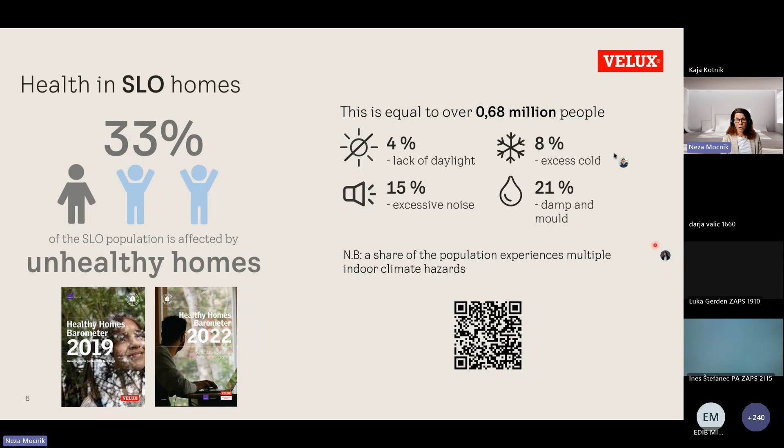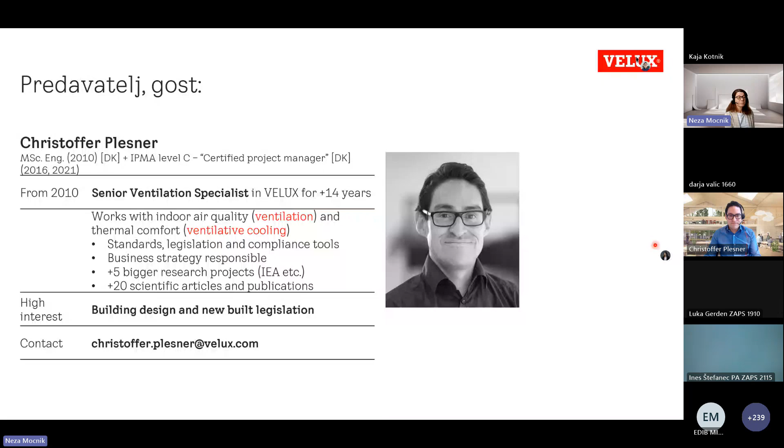Hello, Christoffer, I hope you are with us. Do we hear each other? I'm here with you. Great, great. Yeah, I've said a few slides before you start, but before I give the microphone to you, just let me

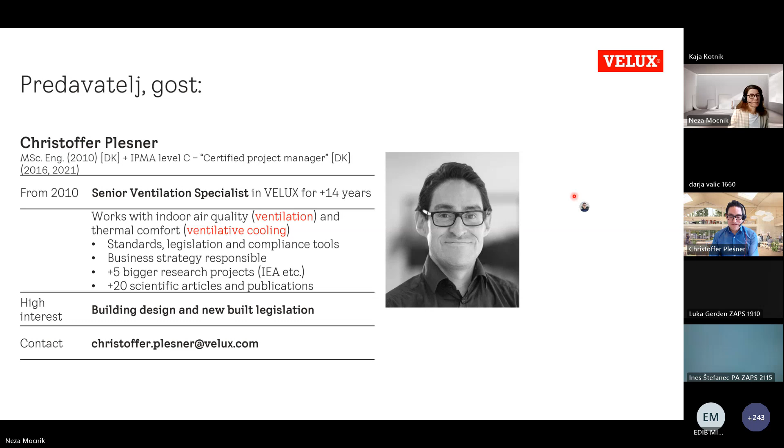Yeah, you should press the slide and it should go forward. Yeah. Okay.

Yeah, so I will start off by telling about well-being in buildings. So buildings must ensure good daylight conditions, view to outside, sufficient fresh airflows, and prevention of overheating, and also offer good connection to outside using windows, and also resilience. So the building should be resilient to, for example, if the power goes out.

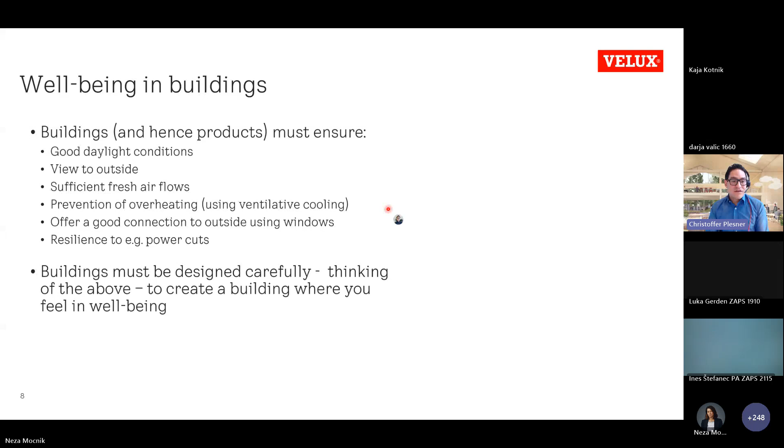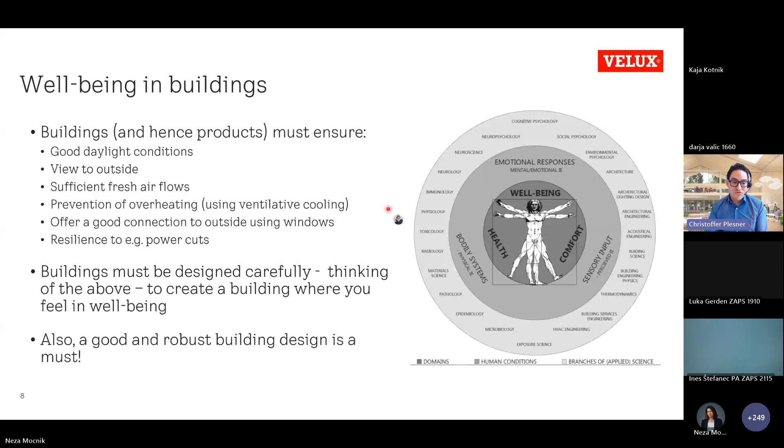Buildings must be designed carefully, looking at the above points to create a building where you feel that you are in well-being. And on the right side, you see a figure showing that well-being is another part of health and comfort. So we want people to be in well-being, and also we want a good and robust building design by using the points that I just showed.

And if we look at the holistic view of a building, we have what we call the indoor environmental quality, which is a lot of things. And in a building, we must take care of the environment, energy, and comfort. But if we look at the indoor environmental quality specifically, there are 4 points. One is thermal comfort, one is indoor air quality, and then you have lighting and you have acoustics. In this presentation, I will primarily focus on the first 2 points. Thermal comfort, that's for temperatures, and indoor air quality is, for example, for CO2.

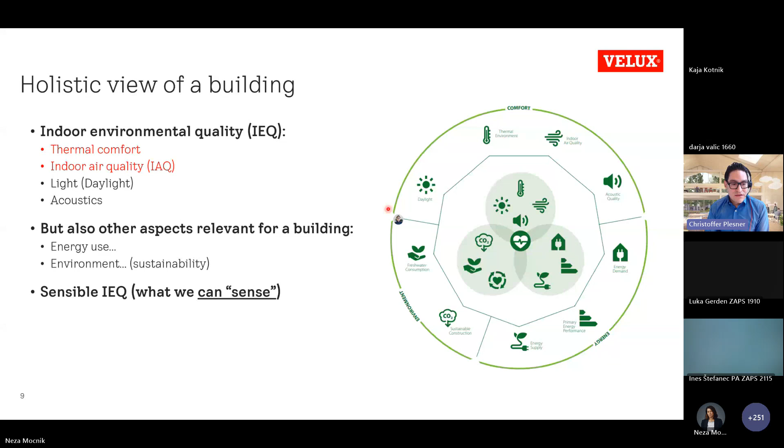And as I said, there are many aspects to take into account, but also look at the energy use, look at the environment. So that is the sustainability part. And then, if you are in a building, there are things we can feel or sense. That is, for example, temperature. You can feel if it's too hot or cold. The light, you can also feel, and if there are bad smells.

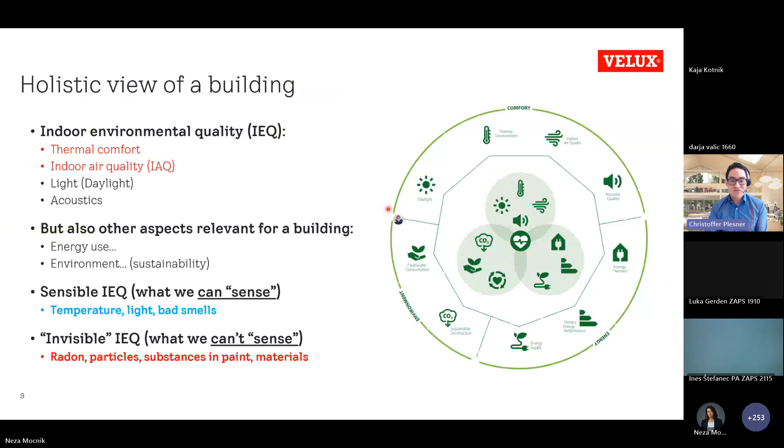But then there are what we call the invisible indoor environmental quality, which are things we cannot sense. So that is, for example, radon, particles, substances in paint, materials. So those are things that we cannot sense. And for that, it is good to have, for example, sensors to register that for you.

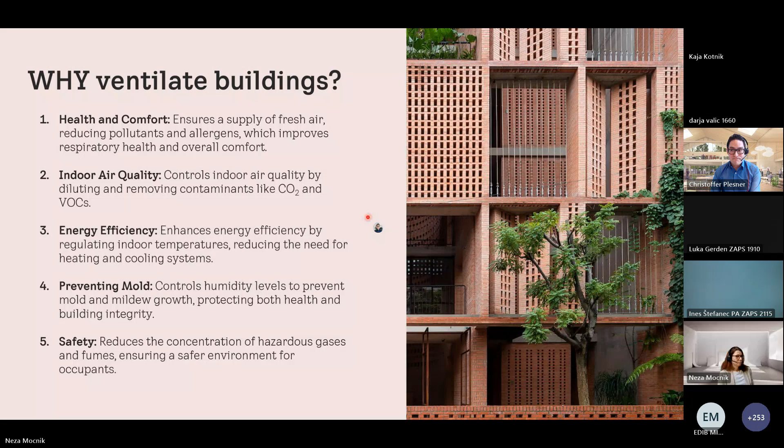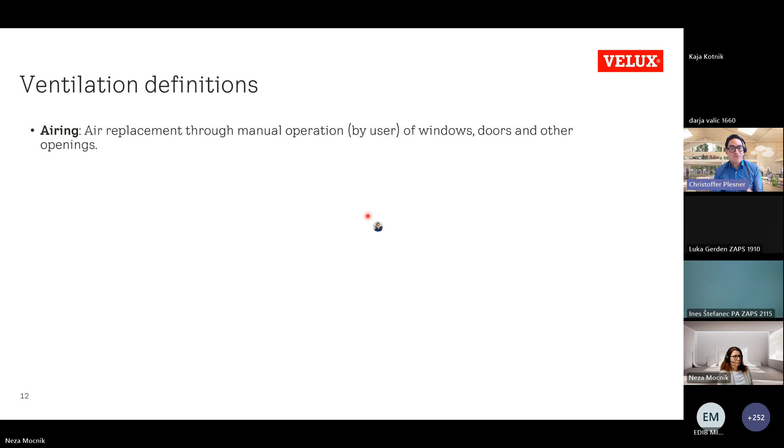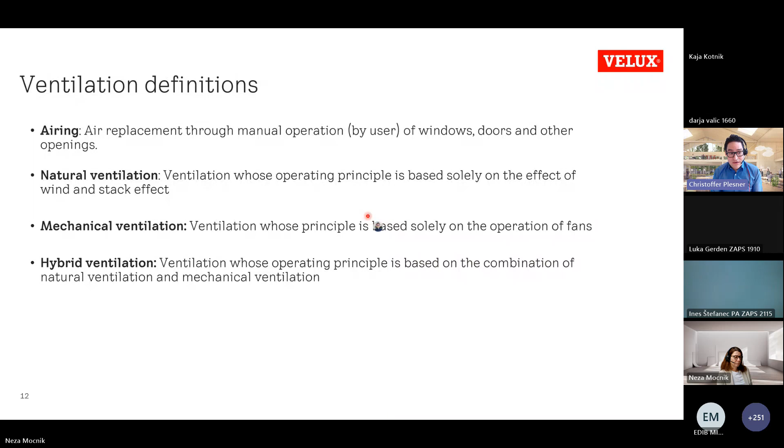I'm pressing, and then we have some ventilation definitions that we think you should know. So airing is if you open the window manually by the user through, for example, windows, doors, or other openings. Natural ventilation is an operating principle based on the effect of wind and stack effect, whereas mechanical ventilation is if you base the principle on the operation of fans. And then we have hybrid ventilation, which is a combination of natural ventilation and mechanical ventilation.

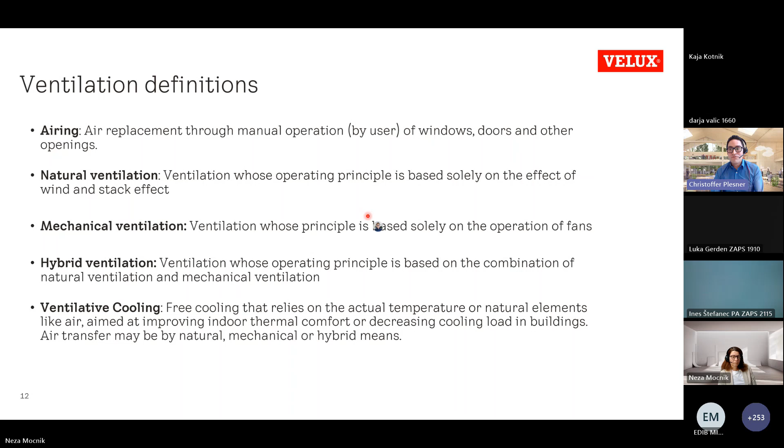And then we have a term called ventilative cooling, which we also use in this presentation. And that is free cooling, where you use the outside temperature, aiming to improve the indoor thermal comfort or decreasing the cooling loads in the buildings. And this air transfer may be by natural, mechanical, or hybrid means. So ventilative cooling is, for example, if you open the window and you can then cool the indoor air using the outside air, which doesn't cost a lot of money.

And airing, as I said, can allow fresh air to come in and the stale air to exit. And this is when you feel a need for something, and here you rely on the natural air movement and human feelings. It's a simple and immediate way to refresh the indoor air, often used in homes and small spaces, and is very good for quick peak pollutant removal.

And then we go into ventilation, which can be by natural or mechanical means. And here you can see for natural, it can be using windows or vents. For mechanical, it can be using the fans or the whole HVAC system in a building.

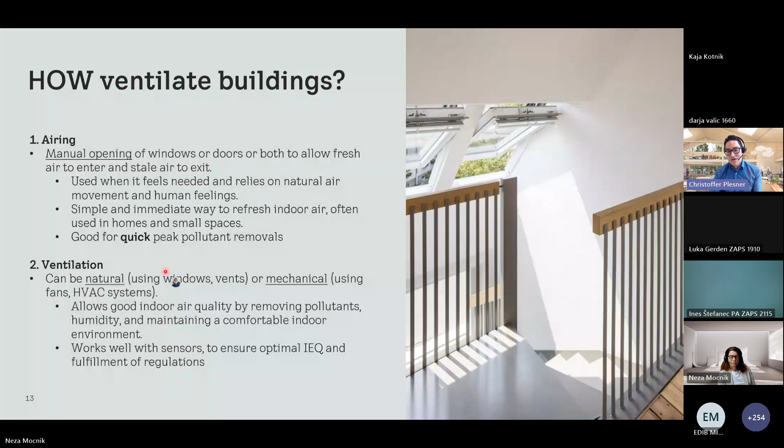And ventilation allows, for example, good indoor quality by removing the pollutants, humidity, and to maintain a comfortable indoor environment. And it works well with sensors to ensure optimal indoor environmental quality and fulfillment of the regulations. And with sensors, it's sometimes easier because then you can register the pollutant that you want to dilute.

There are 3 types of natural ventilation. The first type is single-sided ventilation, which you may have heard of. It's where you have one opening or more, but on the same facade. This is what we call single-sided ventilation.

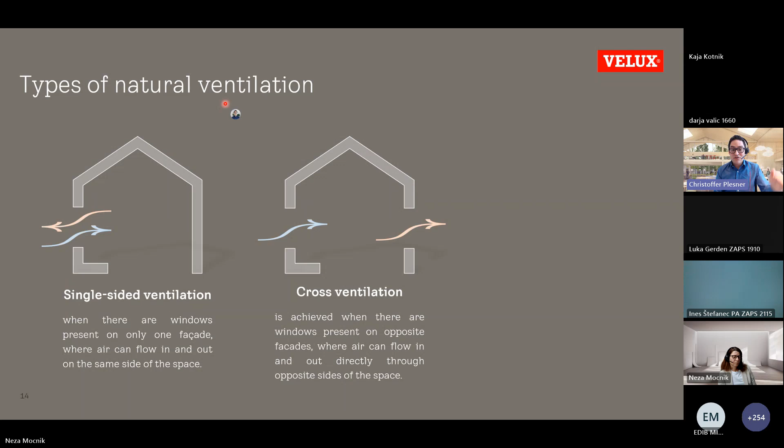Then we have cross ventilation, which is when you ventilate across the building through openings in different parts of the facades. And this can both be through facade windows, but it can actually also be, if you have an attic, through the roof windows in your attic or in the top floor, as long as it's across the room or the building.

Then we have stack effect ventilation, which is when the warmer air is lighter than the cold air, and then the warm air rises and the cold air sinks, and then you can remove the contaminants in the building because the hot air rises, and then you can escape it through the roof windows in the top of the room or building. So those are the 3 types of natural ventilation.

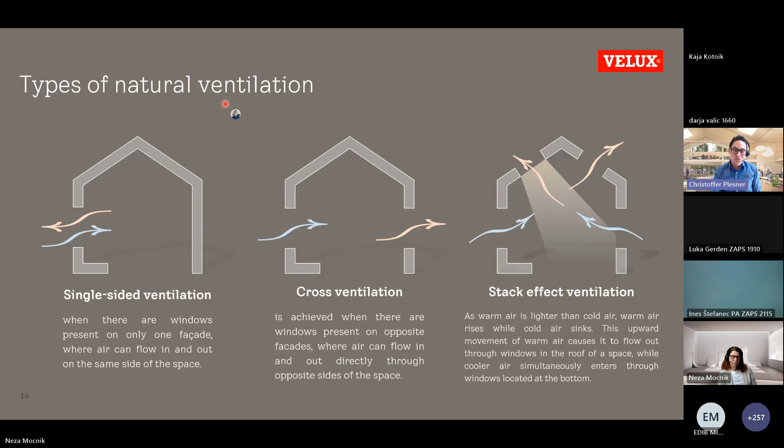And of course, it's important to think of the design here. So if you know that you early on want to use stack effect ventilation, you really have to think of where can you have the facade openings and where can you have the roof openings, because the higher height difference you have between the supply and the extract, the more airflow you can get in your building. So for architects, it's very important to think of the design when you think of these three types of natural ventilation.

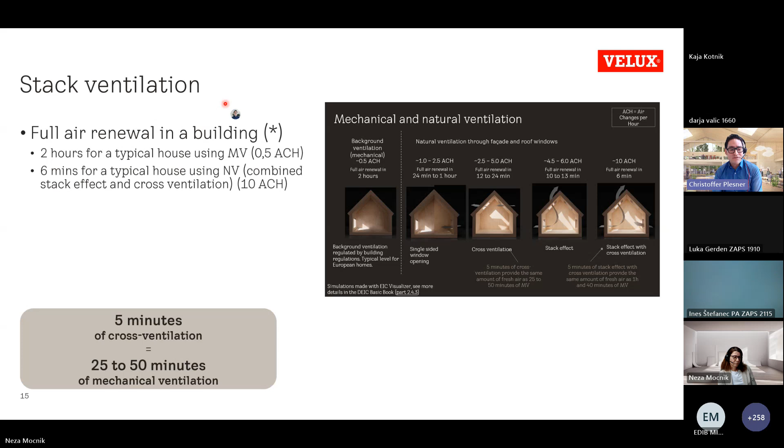And here's a simplification: if you have 5 minutes of cross ventilation, this is the same as 25 to 50 minutes of mechanical ventilation, the 25 and 50 minutes depending on if it's summer or winter. Then if you take 5 minutes with stack and cross ventilation, then you need 1 hour and 40 minutes of mechanical ventilation.

So to achieve a good indoor environmental quality, the typical mechanical ventilation system alone is not enough. So there you often need to use stack ventilation with openable windows to achieve an airflow to dilute, for example, if you have a lot of people in a room or you have painted or something else. So this was just to show you the effect of openable windows in a building.

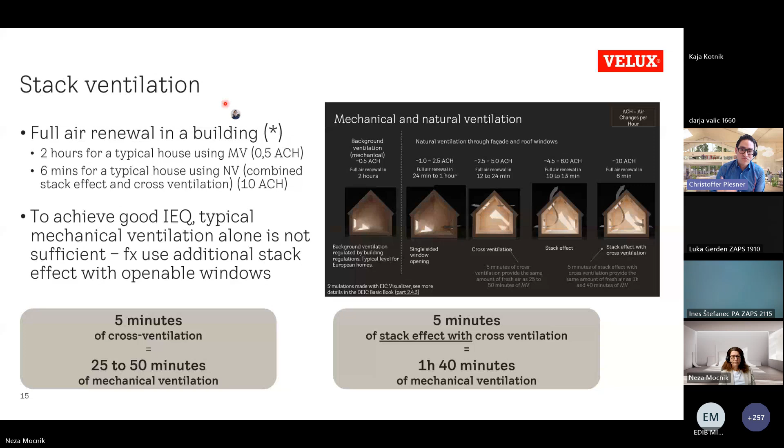And air change rate is the way that you usually, or sometimes in regulations, state the amount of air renewal in a building based off an airflow rate, which could be in cubic meters per hour. So you need to convert that into air changes.

For health and energy efficiency, there are different solutions. Natural ventilation is one. It's fast and intuitive. You can use operable windows, which are a must-have in homes. For natural ventilation, there is a lack of heat recovery. And for mechanical ventilation, you can reduce the heat losses. It's independent from the user behavior. And it's less user-friendly and prone to failures. And this has been shown in many studies.

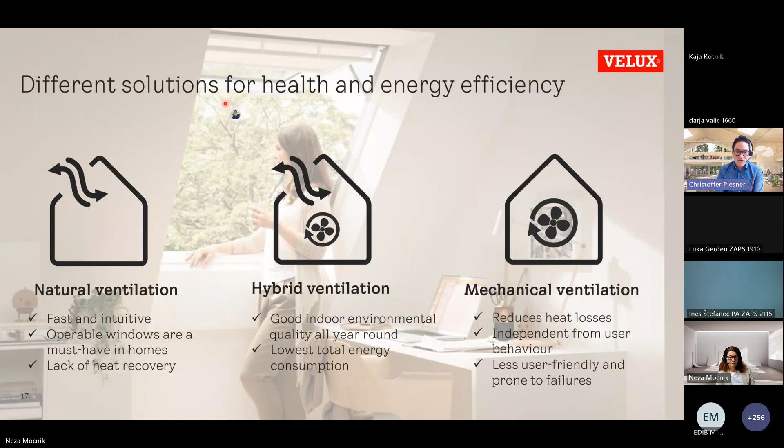But the best solution is usually the hybrid, which is a combination of both natural and mechanical. So then you can switch when the times are right. And this usually is good for the lowest total energy consumption in a building. So if we go a little more into the hybrid ventilation, what is that? It's many things, but as I say, it's a combination of natural and mechanical.

So it can be that you want to run natural ventilation during the summer period and parts of the transition periods when there is a need to cool the building. Mechanical ventilation is very good during winter, where you can have heat recovery to recover some of the heat from the exhaust air that you are throwing out.

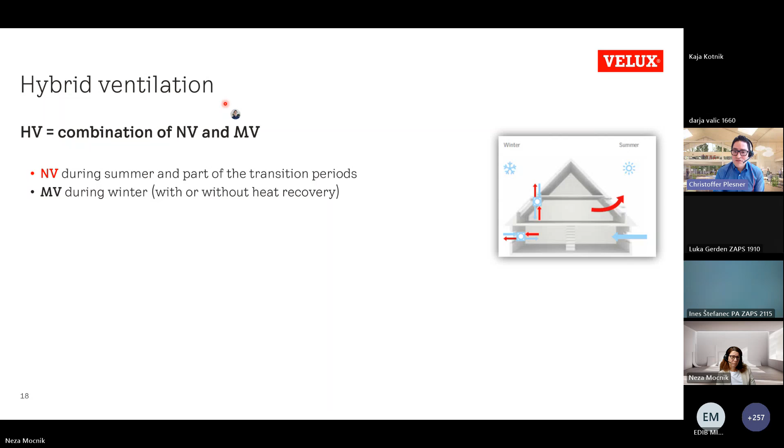And this is just a figure of how this can be shown, where you on the left side have the mechanical part during the winter, and in the summer you open your windows to cool the building. And for the night time, it's very good with night cooling using openable windows.

And then you can also have a natural ventilation system running what we call the basic ventilation, so it changes the air basically, and then you have mechanical ventilation assisting when the driving forces are not enough, so when they're low. And this is a fan that assists the natural airflow.

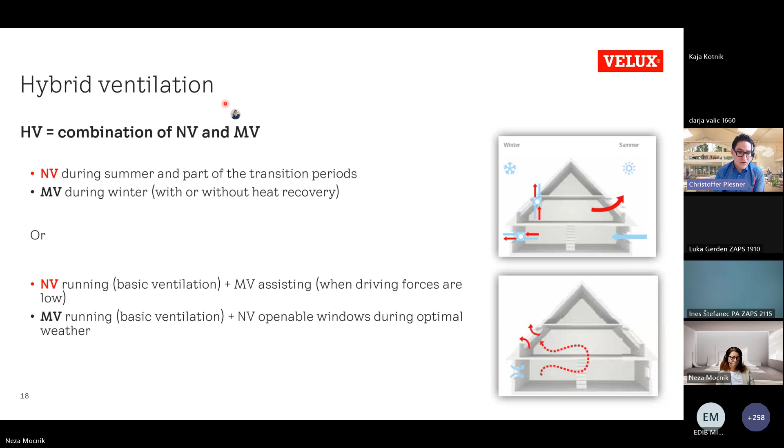You can also have a mechanical ventilation system running basic ventilation at least through the winter, and then you can assist with natural ventilation with openable windows when the outside weather is allowing natural ventilation to run. So there are many types of hybrid ventilation, but these are two typical types that we will talk about. So now you know that.

But the use of openable windows is an important aspect of hybrid ventilation because it's very cheap to open the windows and you can do it when the times are right. And here it's good to think of a sensor system, and we can always be part of sensor solutions.

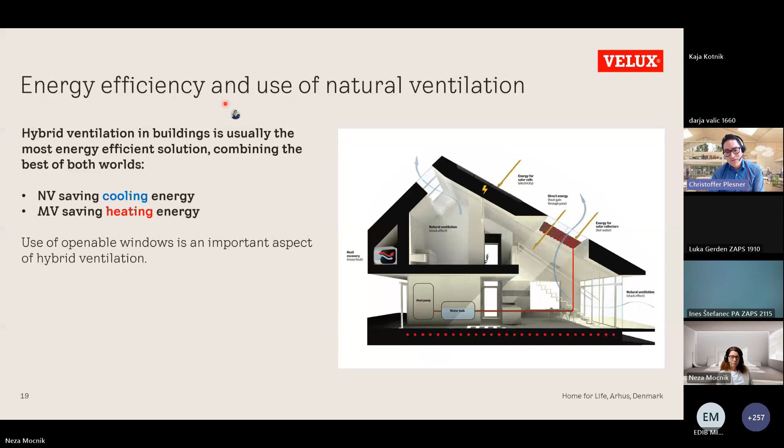Yeah, and then here's a study of, you can say, the relevance of natural ventilation. And this was a study for a residential building. In the study, you see that hybrid ventilation is more energy efficient than mechanical ventilation. So here it was comparing, on the left, mechanical ventilation, which is the bar, to hybrid. So the mechanical with heat recovery is compared to hybrid, where you have mechanical and natural.

So for the hybrid part, you have natural running in the summer period to save some energy. So because of this saved electricity during the warm periods, and the use of mechanical ventilation in the cold and NV in the warmer periods, you have this saving. And this gives a decrease in the total energy demand. You can see this on the right side, comparing 3 cities, Istanbul, Paris, and Copenhagen.

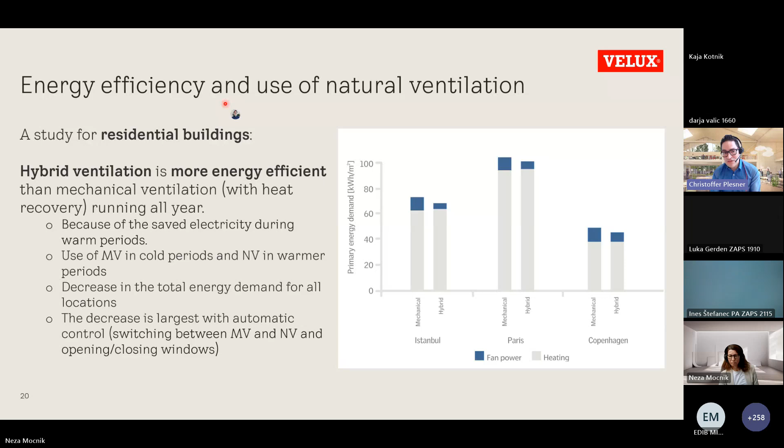And the blue is the fan power. So you can see for the hybrid, you use less fan power because you have natural ventilation running during the summer. So the decrease is largest with the automatic control, where you switch between the mechanical and natural. So you need a good control, of course, to have the best saving.

And then there are benefits of natural ventilation. I think I mentioned it a little bit before, but it's a good solution for peak load situations. This can mean that, let's say, you have a party in your home, or a big meeting, or a lot of people gathered; then you have a lot of CO2, temperature and humidity emitting. And here it's very good to get rid of this polluted air quickly. Here we can use airing by opening the windows accordingly. It can also be when you cook or clean.

And then we must not forget what the humans want. They want to look outside. They want to have a connection to the outside space. They want to hear the birds singing. They want to hear what's going on. And these are the psychological needs. So here is where the openable window is also very strong. It gives you that connection to the outside, apart from, of course, being good for stack effect or cross ventilation.

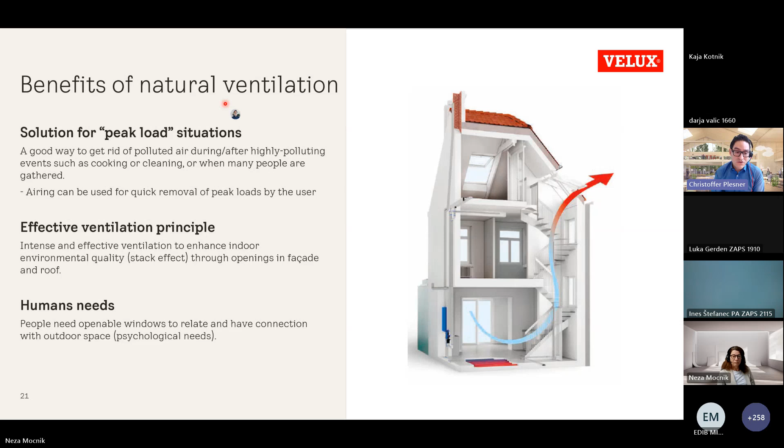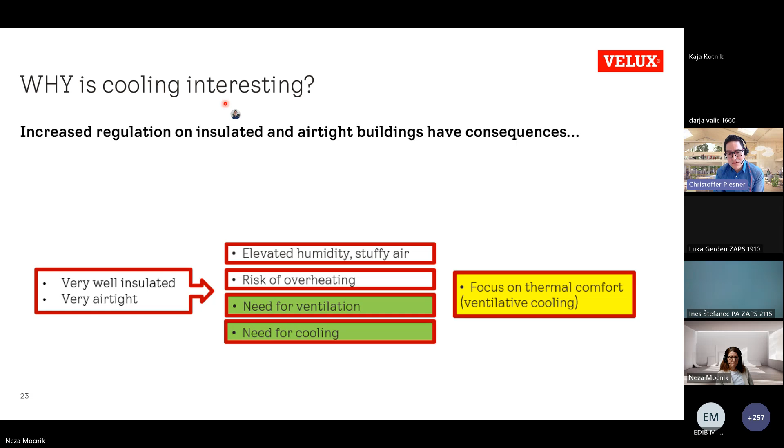But this really gives a need for ventilation and for cooling. And here it's very good to have ventilative cooling, which can cool the building, and this gives a focus on the thermal comfort. And there are requirements in most European countries on temperatures, so the thermal comfort.

Space cooling is, you can say, the amount of energy you need to cool down the building. So we really have to think of the right space cooling solutions. You can always install mechanical cooling, but it uses so much energy. So it's good to think of using passive cooling before active.

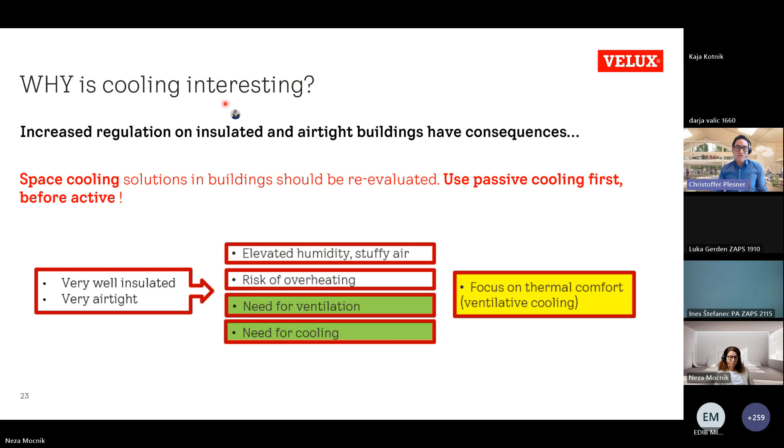So we're not saying you must not use mechanical cooling, because if there is a heat wave, it's a good idea to think of using mechanical cooling for that part. But for the remaining part, it's very good to open your windows, for example, using night cooling.

Why is overheating an issue? We have seen peak and mean summer temperatures, which we estimate, or there are actually nice sources estimating that there will be an increase by 10 degrees across most European capitals by 2080. And also, it has been shown that the energy use for cooling of buildings rose around 200% over the 9-year period from 2010 to 2019.

And we have also seen a 3 times increase in the global energy use for space cooling towards 2050, or at least that's an estimation, which could correspond to a 2 times increase in CO2 emissions for space cooling. So the world really needs to do something about cooling solutions in buildings, and here there's a huge saving potential if we design the buildings right and think about this in the best way.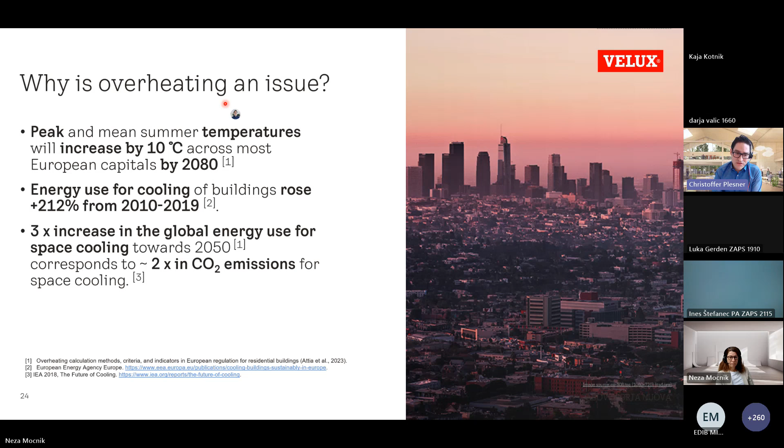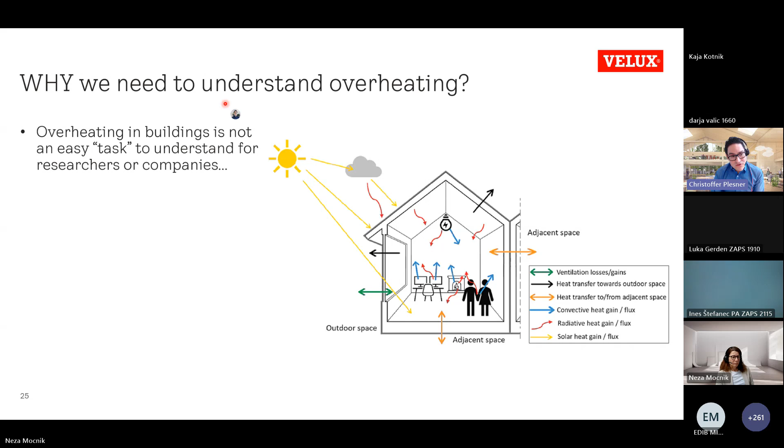So it's not an easy task to understand, but there are many reasons for overheating, and at least ventilative cooling is one solution to mitigate this overheating. So it's just to know that there's a lot to think of during the summer period.

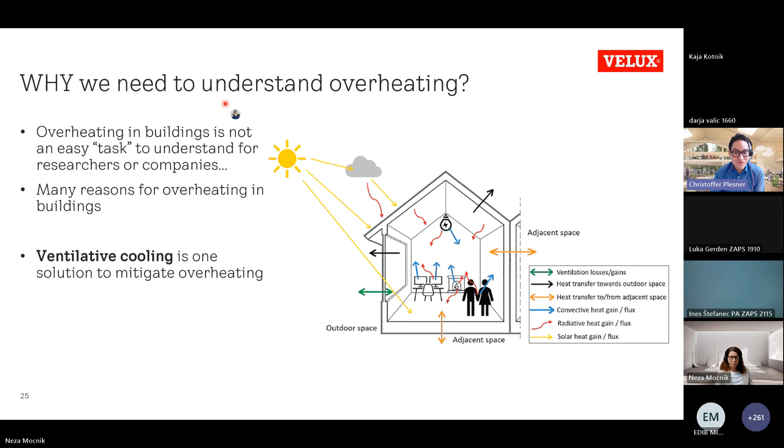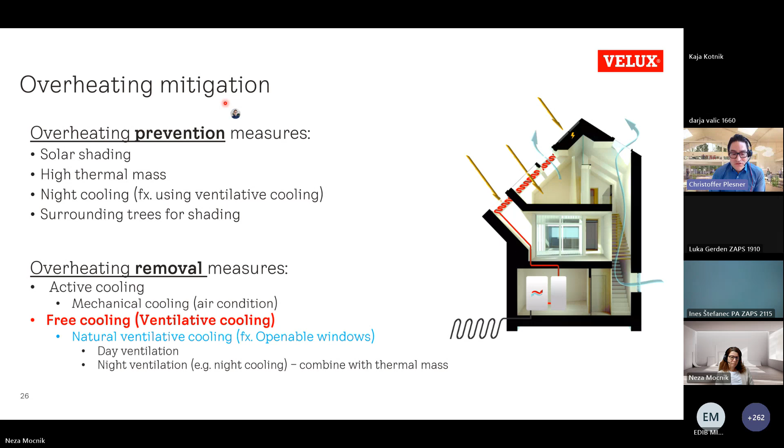But for a lot of the time during the year, you can use free cooling, or what we call ventilative cooling, where you can open your windows, and there can be different strategies during the day and night, because you can also cool a building during the day if the outside temperatures allow it. And then you have to make your strategy according to that. And night ventilation is strongest if you have a high thermal mass in your building.

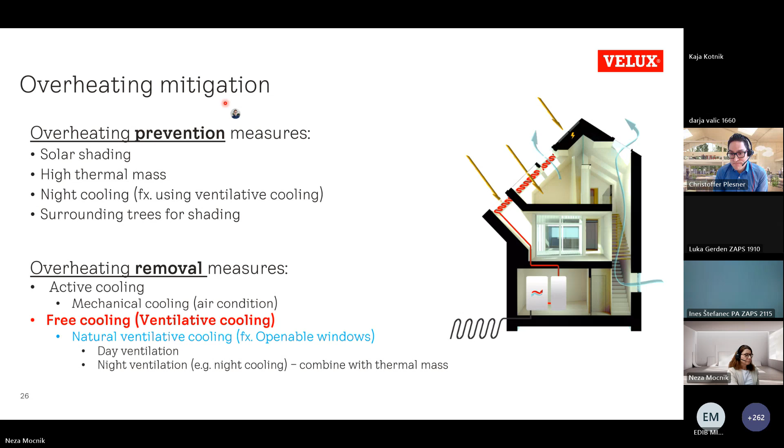And on the right side, you see again an example of a house where you can use the stack effect, and you can do different solutions. Here there are solar cells, for example. You can use that also.

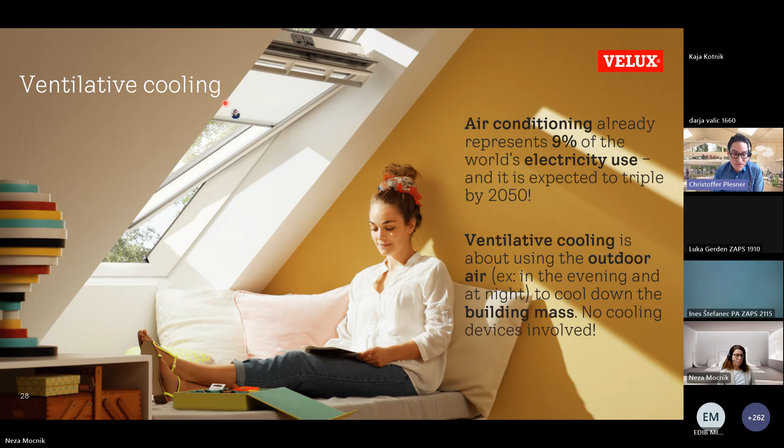So ventilative cooling is about using the outside air, for example, in the evening and the night, to cool down the building mass. And a good thing would be that you don't need devices to run during this time. Then you can save a lot of energy, and you can save the world CO2 emissions.

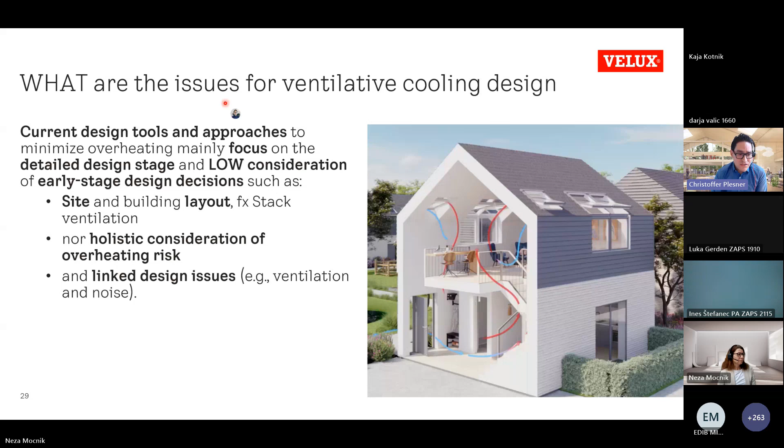because it's very effective. And the current design tools don't look into the holistic consideration of overheating and the linked design issues, ventilation and noise. So there are some things that should be improved.

And then we have an example of a model, what we call the VELUX Model Home 2020. It's really a residential building, but here it was attempted to make a future building that would align with the future regulations. And it was built, as you see, in around 2011 or 2012. And here people lived in the house, and we tested the indoor climate. And here hybrid ventilation was used, so natural ventilation during the summer and mechanical ventilation during the winter.

And it was found that the indoor temperature could be decreased by 5 degrees using ventilative cooling. And this was where you compared both simulations and measurement. And there was a 4-meter stack effect height between the facade windows and the roof windows. And you can see that in a drawing that there's a height difference. So this gave a good flow in the building.

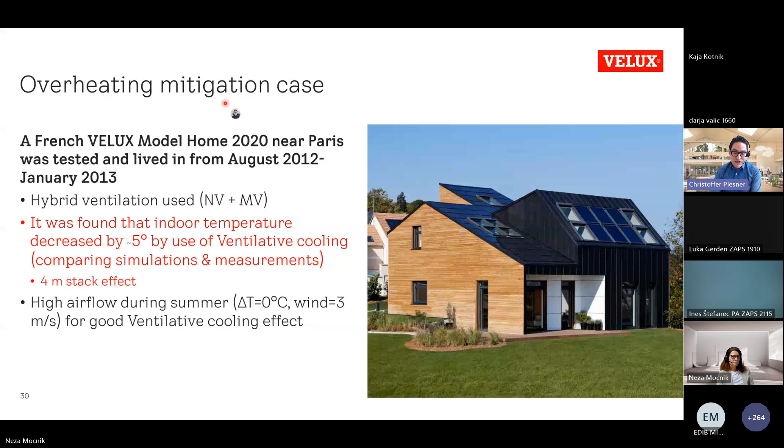There was nice shading in the building, and people were very happy living there. And we achieved a high airflow during the summer, even when there was no temperature difference and low wind speed. So this means that there was a good ventilative cooling effect.

For solar shading, it can reduce the overheating a lot. Solar shading protects the house from overheating in the cooling period, so during the hot periods. It enables to keep a sufficient glazed area for daylight and ventilation, and allows for useful solar gains in the colder months, because you take it up and down when you need it.

And according to simulations from Ljubljana in Slovenia, placing exterior shutters on roof windows can reduce the indoor temperature by up to 6 degrees and up to 3 degrees with internal blackout blind. Really effective to use solar shading on your windows. And it's both for roof windows and facade windows. It's a good strategy to have.

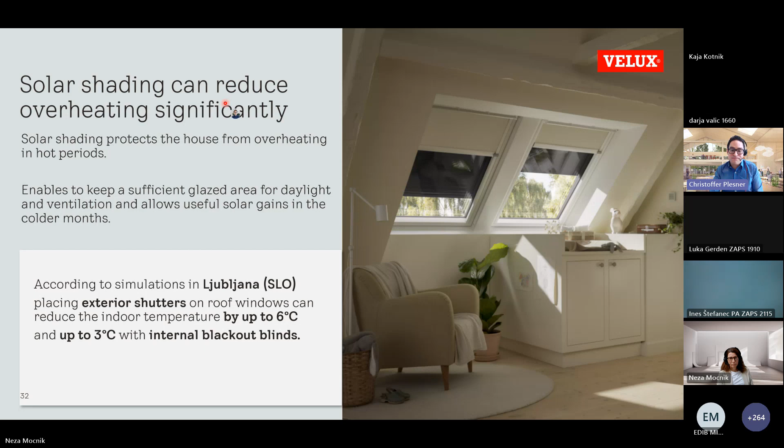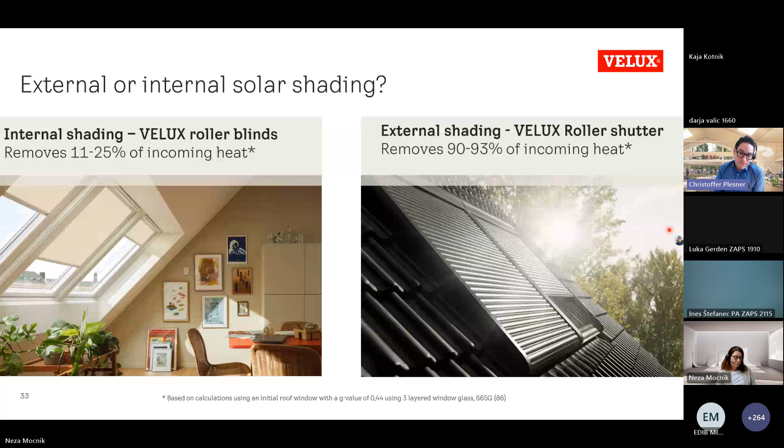Then the question is, should you choose internal or external solar shading? Well, internal solar shading, for example, the VELUX roller blinds, can remove between 11 to 25% of the incoming heat. Whereas if you take external solar shading, it's more effective. It's the VELUX roller shutter, for example. It can remove up to 93% of the incoming heat. So it's very effective, and you can choose the solution that suits you the best.

And then we also have standards and legislation. And for example, what does the EU directive say from the EU Commission? At the EU level, we have what we call the Energy Performance of Buildings Directive, the EPBD 2024/1275. This prioritizes reducing overheating through passive cooling measures.

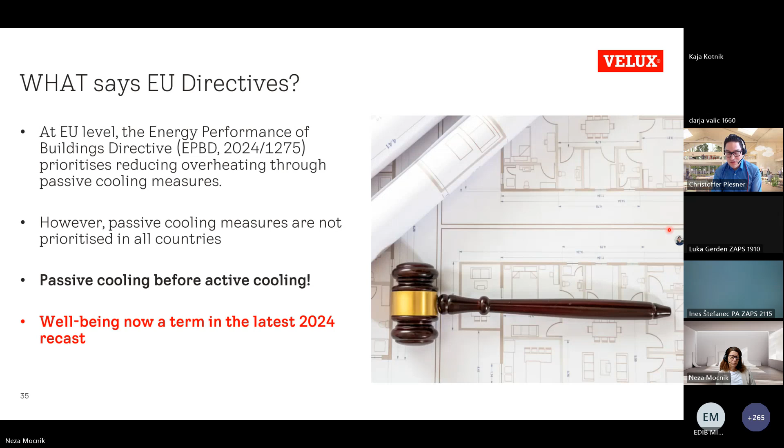However, the passive cooling measures are not prioritized in all countries, and not all countries are fully supporting the passive cooling measures, but since the EPBD is doing it, countries shall also follow this over the next many years. So again, passive cooling before active cooling would be a good idea. And also well-being is now a word used in the latest EPBD version, also speaking of well-being in the beginning of the presentation.

Then we have future building legislation. So to ensure full compliance and ensure that you really fulfill the requirements, it is a good thing to have sensor-based natural ventilation or sensor-based hybrid ventilation, because then you can register the parameter you want to control. That could be temperature or CO2 or VOCs, whatever.

And then you can open the window when needed. Because if the level the sensor registers is too high, then it will open the window. And if the level is not high enough, then it doesn't need to open the window at that time.

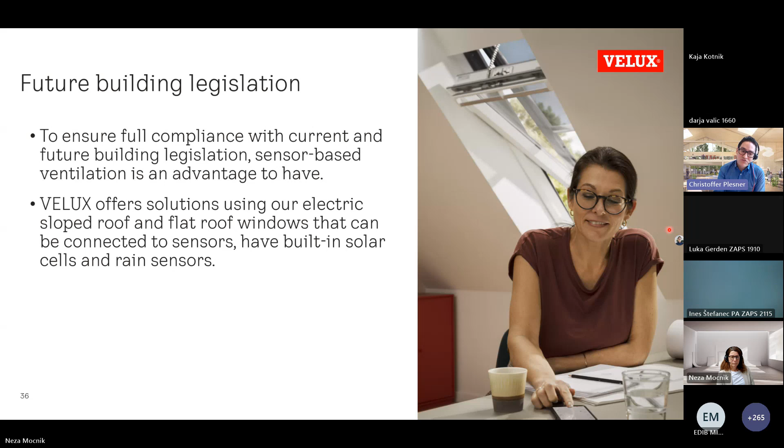VELUX offers solutions using our electric slope roof and flat roof windows, and our windows can be connected to sensor systems. We also have built-in solar cells, and that is good for resilience in buildings. So if the power goes out, you actually still have power because it's solar cells. And rain sensors, so the windows can close to flat position if there is rain.

And then there is why to use ventilative cooling. Well, there are a few reasons. One is the resilience part. So buildings should be robust and the system should be robust. Ventilative cooling can support the robustness and resilience of buildings by using manual openable windows or solar powered solutions. So it means if the power goes out, as I said previously, you can still ventilate.

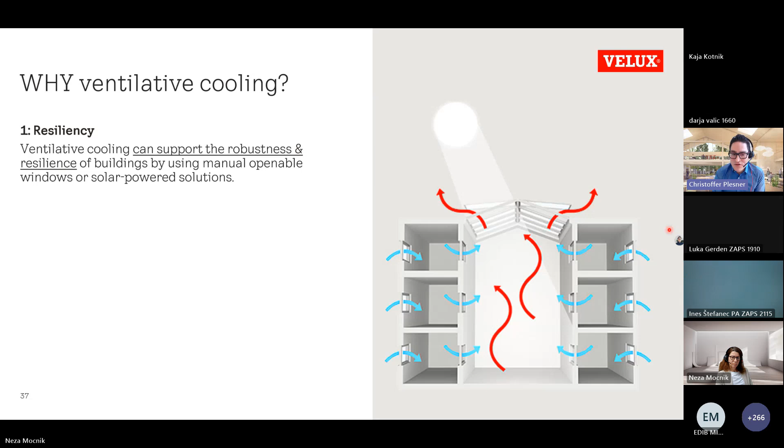And this is better than if you have a mechanical solution only, and if the power goes out, then you have no ventilation in that period. So hybrid ventilation is a good solution to have, so you can choose the system that is best for that time. And for the indoor climate, ventilative cooling can effectively reduce the building's energy use. And this, of course, is what we said, instead of using air conditioning at that time.

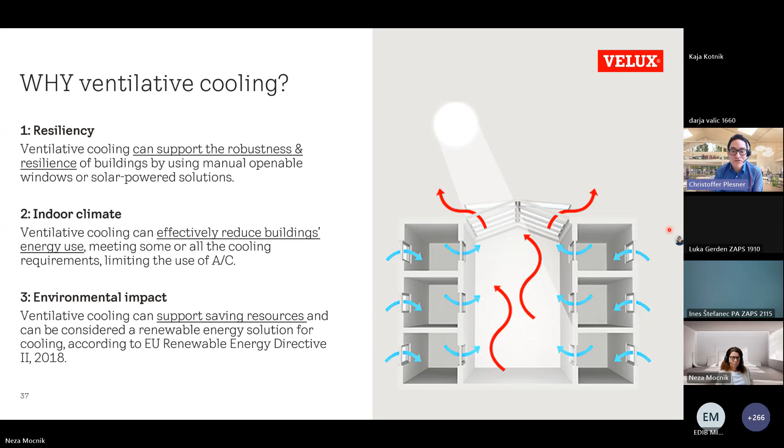Then you have the environmental impact. Ventilative cooling can support saving resources and can be considered as a renewable energy solution for cooling according to the EU Renewable Energy Directive 2 from 2018. So actually, openable windows can be termed as renewable energy for cooling, and you can use it in your calculations. It's also good to know.

There are new standards on the way in Europe, and the reason this is done is that ventilative cooling or passive cooling or free cooling, whatever word you want to use, was not really dealt with in the right way. So new documents were made both in the European standardization and in the ISO, which is the international standardization committee. And the plan is, of course, to support the European directive, the EPBD.

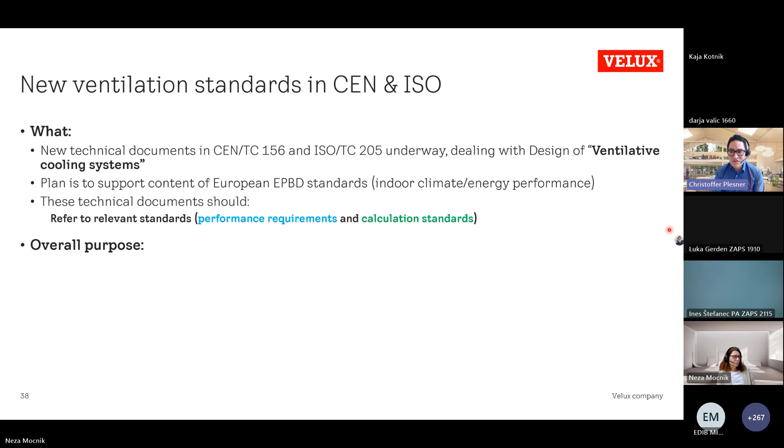And these documents should refer to the right standards. And here we have something called performance requirements and calculation standards. So for example, you can also calculate your airflow rate in buildings by using certain European standards. These are usually EN standards.

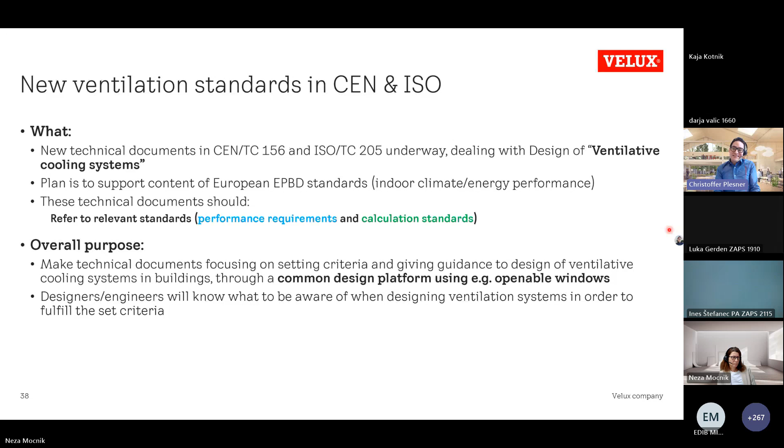And so these documents are made to set criteria and give guidance on how to design ventilative cooling systems in buildings through a common design platform using, for example, openable windows. And this will help the designers, architects, engineers to know what to be aware of when designing these ventilation or ventilative cooling systems to fulfill the criteria you set in the beginning of your project.

So I will just take you through 3 standards that are underway and will be published in the next years. One is called Ventilative Cooling Systems Design. It is for all buildings. The main purpose is thermal comfort, and it's going to be a CEN technical specification. It's applicable to natural, mechanical, and hybrid ventilative cooling. And this can be expected in 2026.

And this will show you how to design free cooling systems for any building with a design procedure that all countries can use. And at one time, it could be hoped that it will come into national legislation also, but it's starting with the standards. And then there's an ISO standard called Design Process of Ventilative Cooling Systems Part 1. This is expected in 2027, and it's also for thermal comfort, so to reduce overheating.

And then we have another project which is called Ventilation Systems in Residential Buildings Design. It's the updated EN 15665, which some of you may know or may not know, but the main focus here is indoor air quality, so it's not the cooling. And this is applicable to all ventilation systems, so natural, mechanical, and hybrid. This is expected in 2027. So there are many design standards on the way that will help you and guide you how to design systems for your buildings.

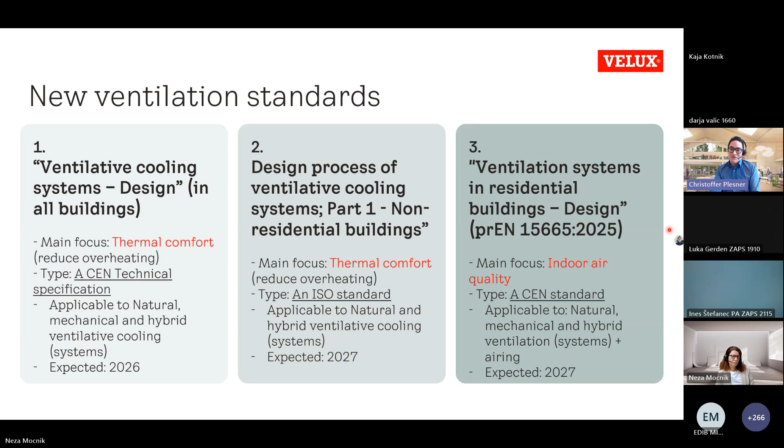Then there is what I told you about the ventilative cooling standard. And in this standard, there is something we call the ventilative cooling potential method. And this can estimate the potential of the outdoor air for cooling in all locations in a simplified way. And here we have what we call ventilative cooling modes 0 to 3. On the right side, you see an output of one of the tools that are already available for you on the internet. So you can go online, find the tool and start working with it.

And the output is what you see on the right side for every month of the year using your weather data. So that's like 8,500 hours or however many hours, in an Excel file, then you can put it into the tool here, and then you can get an output like this. So for example, you can see for VC mode 1 and 2, that's when you can use ventilative cooling. And then you can see if you need mechanical cooling or not. So that is a very relevant document for architects to design a passive cooling system.

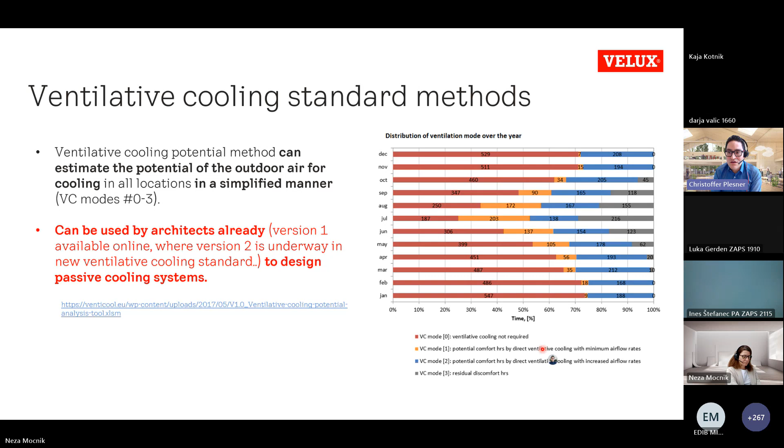And you can go on this link here, and then you can try it out if you want. And in the standard, we're doing a version 2, which is even improving it. So this was for you to know that there already exists a standard, a tool that you can use for design of free cooling.

And the conclusions for this presentation is that openable windows in regulatory documents are, you can say, good for indoor quality all year, where you can use intensive ventilation, so you can do these really high airflows. Also good for thermal comfort in overheating periods, using ventilative cooling and solar shading. I think it's important to also remember the solar shading to prevent too much heat from coming in.

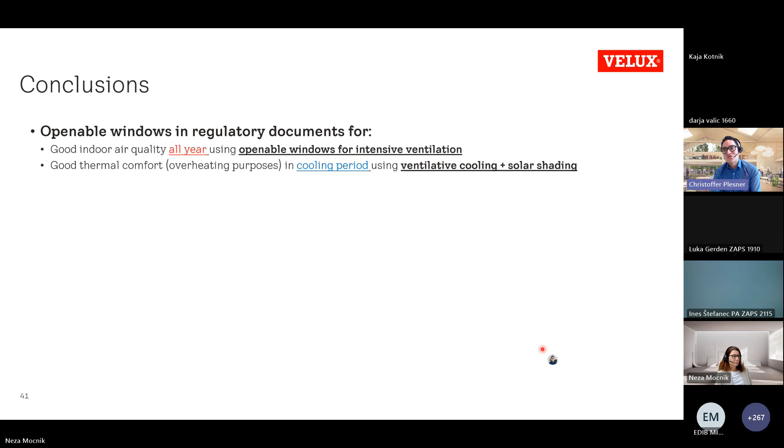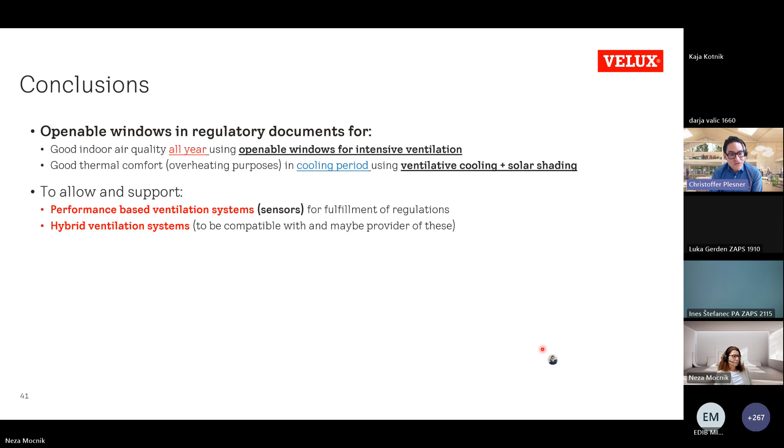And in the future, it's good to think about that performance-based ventilation systems with sensors is a good way to fulfill the regulations. Hybrid ventilation systems should be compatible with these, and this has to be thought of. And also, actually, there are some countries that have legislation on cooker hood requirements. But one thing that automatic openable windows can do is that in a cheap way, it can give you the supply air, because when you turn on your cooker hood, then it's a very high extract airflow. So unless you have supply airflow, then you don't suck anything out in your kitchen.

And this has been seen in some low energy buildings, for example, in Denmark and some other places where there was not enough supply air through the mechanical ventilation system. So if you install automatic openable windows that are connected to the cooker hood, then you can get all the air you need when you turn on the cooker hood.

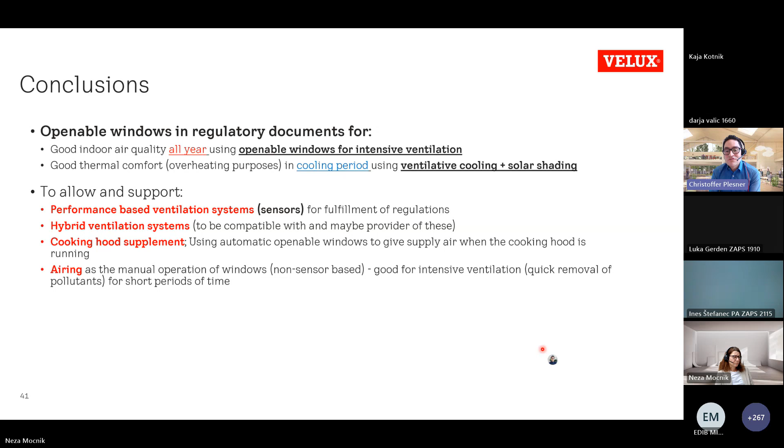And for airing purposes, as I said, the manual operation of windows without sensors is good for intensive ventilation for quick removal of the pollutants when you feel like it, and if the power goes out in your building. Natural ventilation and ventilative cooling, if installed with sensors, are good to fulfill legislation and can fulfill the annual requirements based on, for example, maximum temperature levels, because there are requirements in many countries on how long part of the year you can have a maximum allowed temperature.

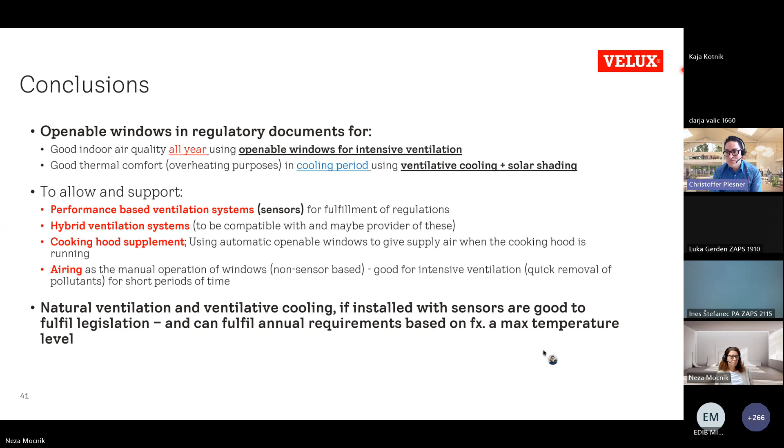Super, yes. Christoffer, thank you for this great presentation. I really enjoyed it, and hope that all the people did as well. Actually, before going to practice, I'll show some cases.

Just to wrap up a bit, I think as architects, we have a very, very important role in how the future buildings will withstand all these climate changes, and also we cannot see the world of mechanical ventilation and the world of natural ventilation as separate worlds. We should combine them together in a way that we get the most out of the benefits of these two ways of ventilation.

And I'm really happy that you announced the future tools, the tools that are already available, as you said, to predict if the airflow in the buildings is sufficient, so that we can achieve the proper ventilation. Did I understand correctly?

Yes. Yeah. Okay, so maybe let's talk more about it at the end. But before, we have some more slides, and now I will speak back. We'll speak in Slovenian language.